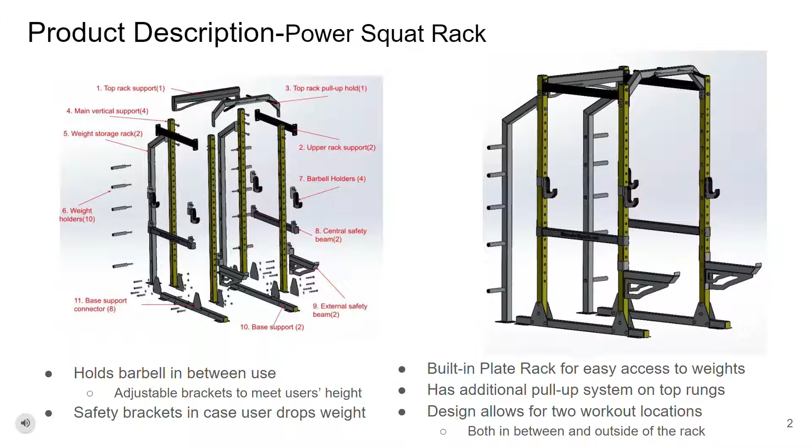In addition, it also has a section for weight storage at the back. At the top, it has a section for pull-ups or other body weight exercises in a hanging position. And additionally, both inside and outside of the rack, it has two positions where the user can either work out inside or outside of the main enclosure.

Our primary and secondary customers would be small gym owners and home gym owners, respectively. Small gym owners would be ordering a number of racks at a time in order to support their business. In addition, they would be ordering more and more racks as their business scales, being a reliable business partner to come. Their expected total volume would be 1,800 racks a year. Secondarily, we have home gym owners who would order a smaller volume of racks, and their total estimated volume would be 450 racks per year.

Our functional analysis was diagnosed using a FAST diagram. Our task function overall is to simplify exercising. Our primary basic functions are to store our equipment and add feasibility. To store our equipment, we add weights and then contain the weights. For our feasibility, we allow our users adjustability to the overall mechanism and connect support bars.

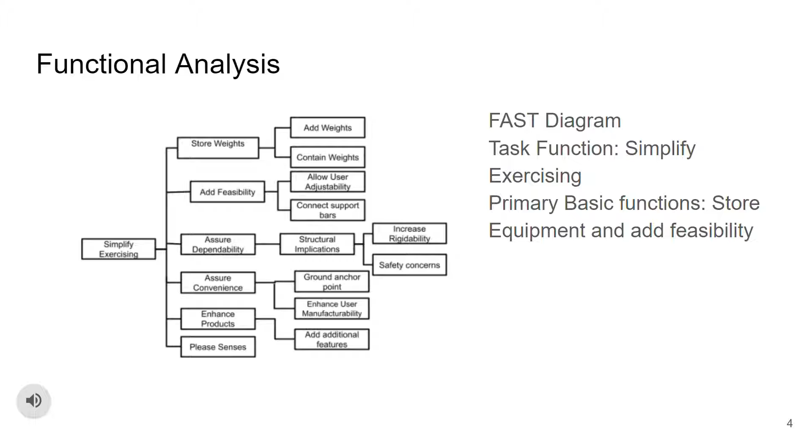To assure dependability, we have structural implications which increase the rigidity and also our safety concerns. To assure convenience, we add a ground anchor point, and we enhance the overall user manufacturability. To enhance the product, we add additional product features which will simplify exercising further, and also to please senses.

Here we have our assembly sequence analysis. The first one on the left starts with a bottom x-axis support and a z-axis support bar. Added to that are two adjustable x-axis supports, one with the cantilever beam style. Then, the weight plate storage bar, the barbell, and plates are added.

The second part is the same thing except with the first two steps switched. So first, an adjustable x-axis support and an adjustable x-axis support with the cantilever beam are added to a bottom x-axis support and a z-axis support bar. Then the weight plate storage bar, barbell, and plates are added to it. Those two designs are almost exactly the same, but the only difference is the first two steps are switched.

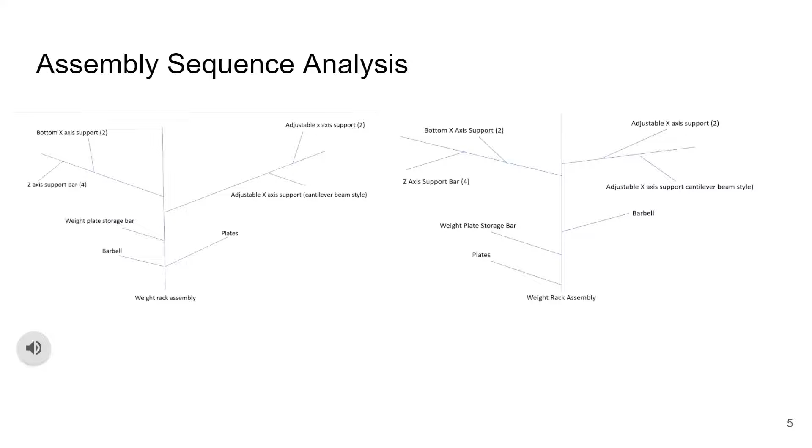This is the bill of materials for our initial assembly. The total amounts to roughly $1,550. One thing to note, however, is that the M18 bolts amount to more than half the cost of the rest of the materials. This cost can be drastically reduced by using cheaper bolts rather than using the bolts from McMaster-Carr.

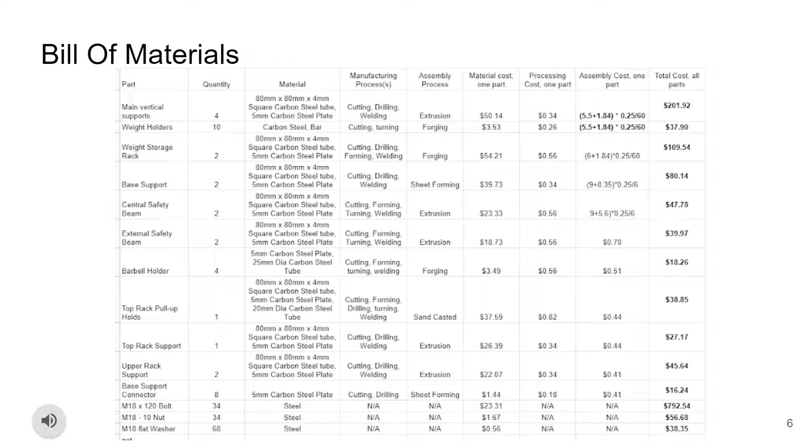As you can see in the quad chart, as mentioned in the previous slide, the bolts are the main cost in this assembly. We did not, however, feel that it was necessary to redesign the weight storage rack or supports, since they are such an integral part of the design and provide the backbone of the squat rack.

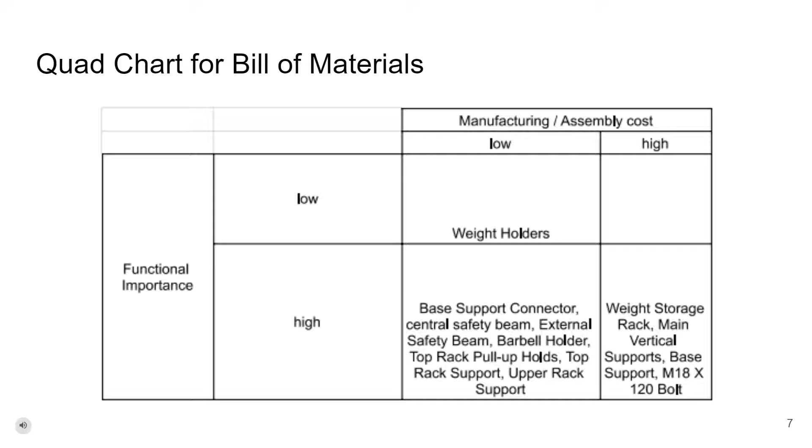Here you can see a diagram of our functional component mapping matrix. As you can see, the function of storage has a total of 5 parts that are fulfilling it. The function of safety has a total of 2 parts, and the function of increasing rigidity has a total of 4 parts. We can also see that there's a total of 4 parts that are fulfilling more than one function. An ideal functional component mapping matrix will have a one-to-one relationship with the functions and the components.

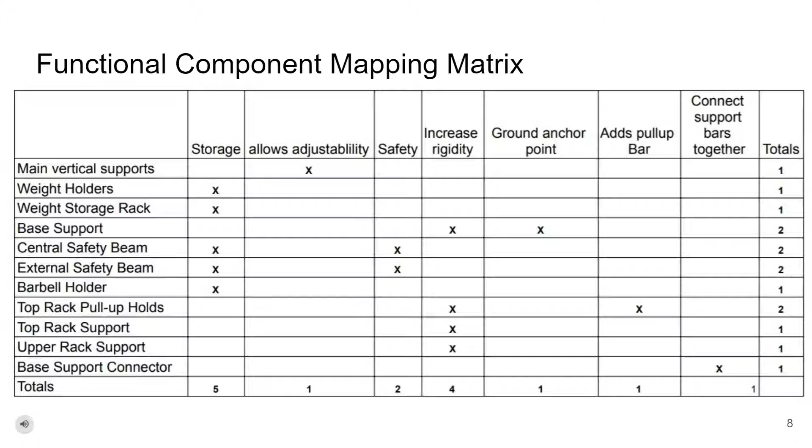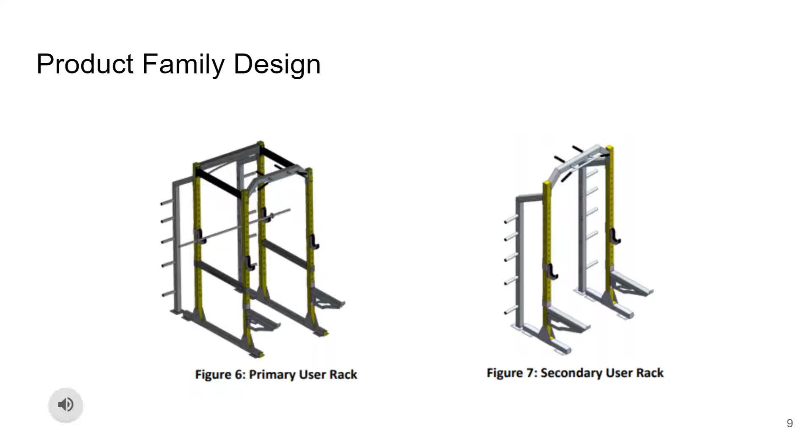In this slide, you can see our primary user rack in Figure 6 compared to Figure 7, which is our secondary user rack, which is a lot more mechanically feasible.

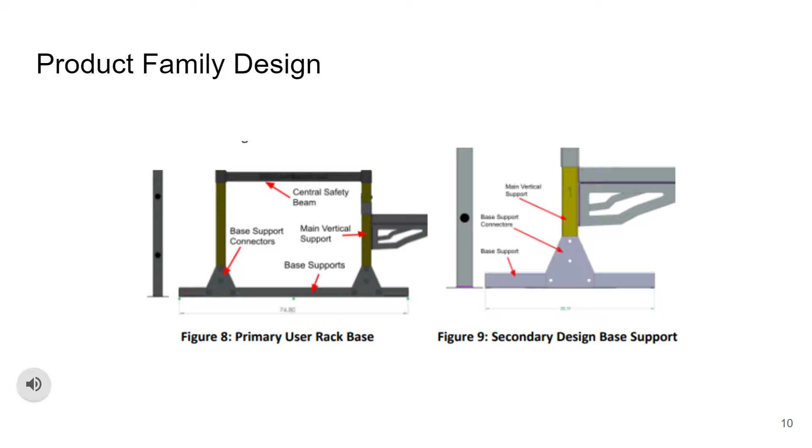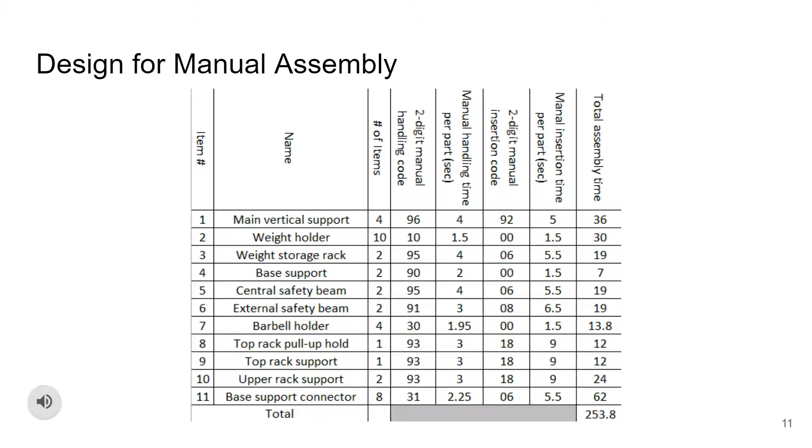This spreadsheet shows how much time is taken for manual assembly. At roughly 254 seconds, the rack does not take much time to assemble, as it is fairly modular in design already. However, one thing to note is that the base supports take too long to insert, and amount to about 25% of the total assembly time. Hence, our redesign is fairly simple. The old design required 3 interlocking parts along with 4 bolts, 4 nuts, and 8 washers. The redesign requires no fasteners and only 3 parts.

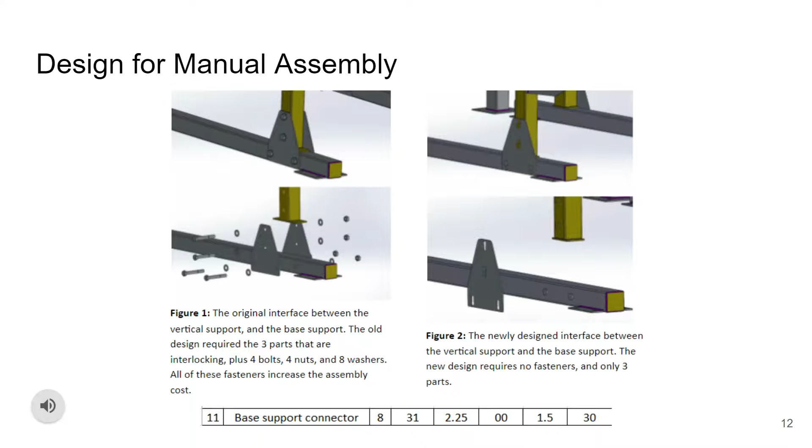For the automated part of our assembly, we chose to focus on the weight holders. Previously, they were assembled using a nut at the end, which we found was very inefficient cost-wise after running through the cost analyses on a part to be automated. After running through the automation guidelines, we drew specific inspiration from number 2 and number 11, and instead came up with a quote-unquote lock and key method, where you insert the cylinder with a flange at the top, and then it is rotated downward so that the cylinder can no longer move and it is locked in place. This is all done by machine, hence the automation, and we found that this dropped our total assembly cost down to half after enabling this one feature.

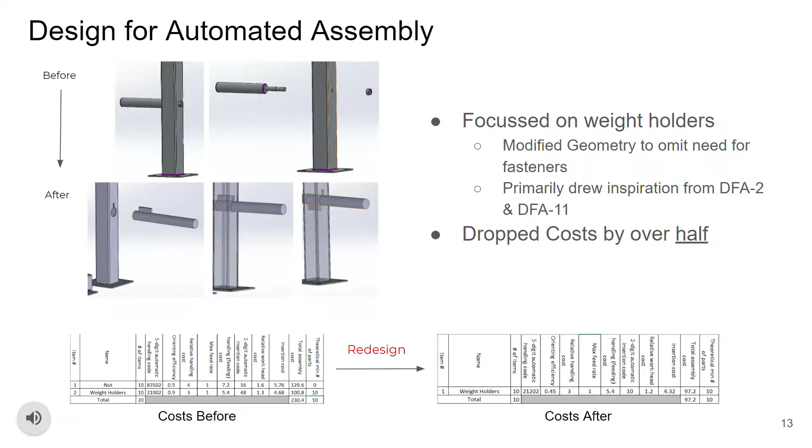The process selection for vertical supports goes as follows. Sheet metal forming is the ideal manufacturing process based off of the material, batch size, and overall custom nature of this manufacturing process. The material that we are using is carbon steel, which is a ferrous material. The shape is prismatic, non-circular, and we estimate the mass between 8 and 9 kilograms per vertical support. The tolerance is 4 millimeters, which will allow us to join to the base, and our overall batch size is less than 2,000.

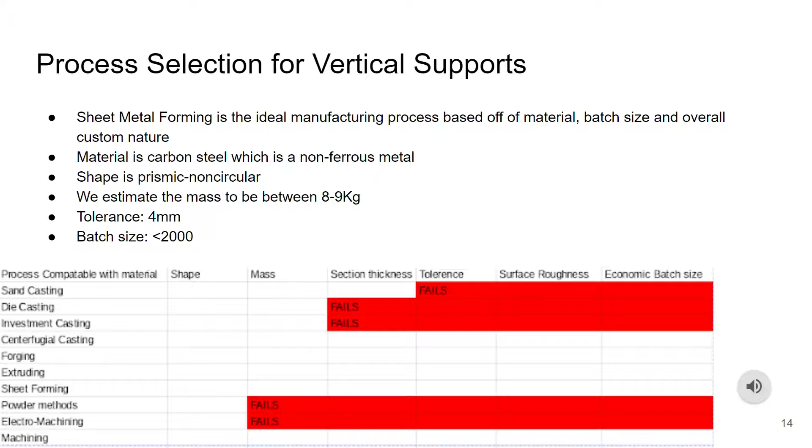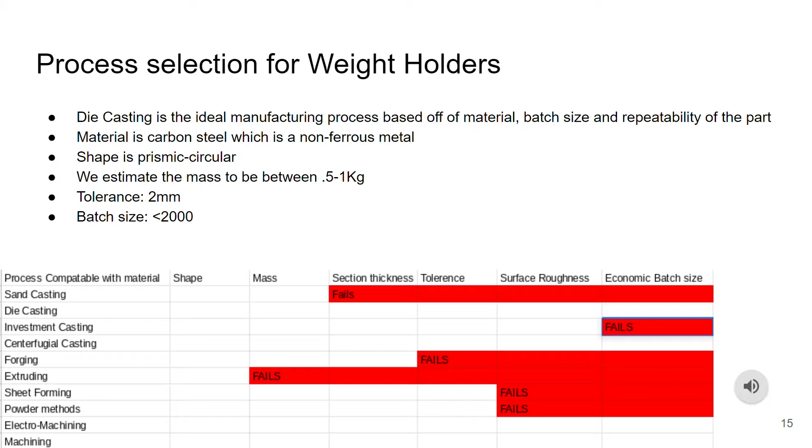The process selection for the weight holders goes as follows. Die casting is an ideal manufacturing process based off of the material, batch size, and repeatability of this part's manufacturing process. The material we are dealing with here is still carbon steel, which is a ferrous material. The shape is prismatic and circular. We estimate the mass between 0.5 and 1 kilogram. Our tolerance for this part is 2 millimeters. Our batch size is less than 2,000, as well as the vertical support.

Here's our design for manufacturing slide, and in our redesign we omitted the need for fasteners, which greatly dropped the time and cost needed for automated manufacturing. The original cost estimation of the materials for one unit was $1,550.67. After subtracting the bolts, we dropped that value to $566.07. The original cost of manufacturing was $978.13. The redesign cost was $692.67.

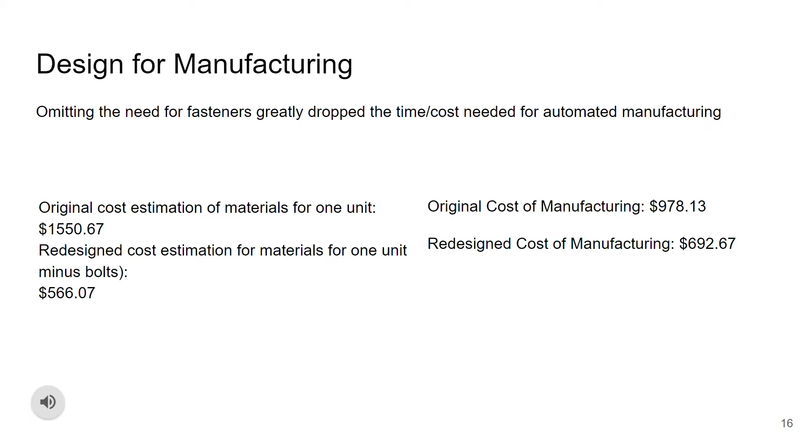For the service, we decided upon a technically minded personal trainer, someone who can both maximize the potential of the squat rack as well as help any potential users use the squat rack. For the primary user, the technically minded personal trainer would be someone who would prioritize maintenance of the machine as well as help anybody who can use it directly. And for the secondary user, the personal trainer would be someone who did one-on-one coaching, helping the home gym owner maximize the potential of their squat rack.

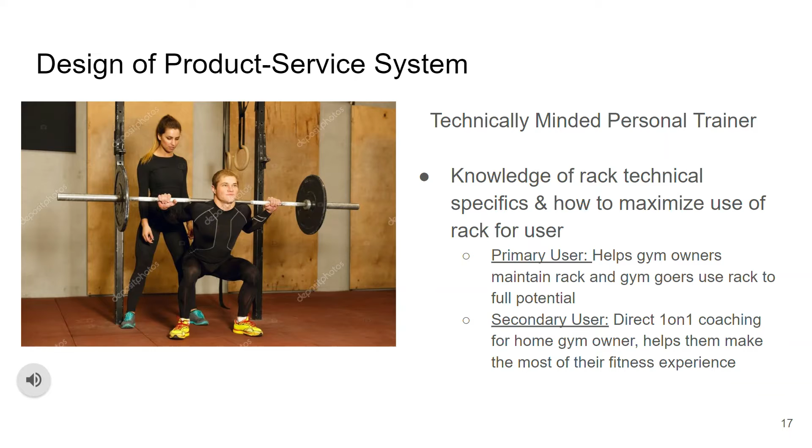In conclusion, the redesign saved us a total of $1,270 and allowed us to reach a new customer market due to the smaller footprint and lower cost of the second variant of the racks. One improvement that we definitely want to make going forward would be having more impressive innovations. Given more time, we believe that product differentiation could be done better and at a greater scale.